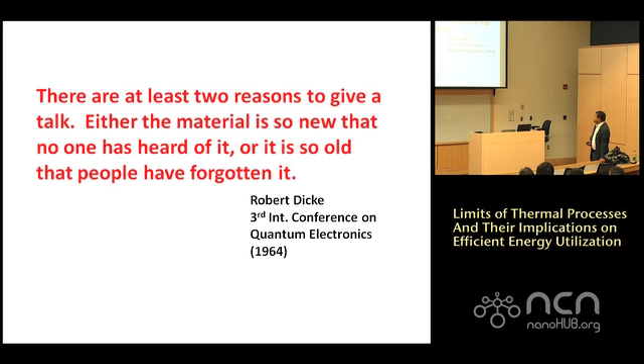This is a famous quote: there are at least two reasons to give a talk. Either the material is so new that no one has heard of it, or it's so old that people have forgotten it. I'll try the risky option of doing both.

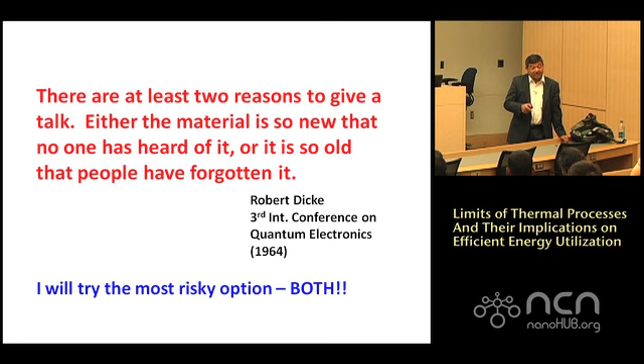I think it's important to look at old problems with new tools, because old problems generally don't go away. I'll briefly touch upon that, then go into a topic we're trying to penetrate, which turned out to be a science problem but really came from the engineering side. If you can change the science, you can go back to engineering.

Heating is about 40 to 50% of buildings' energy use. It's generally a very large fraction of industrial energy, because that's mostly petrochemicals. Cement, steel, paper, glass, these are all heat-based. And of course transportation today is mostly engine-based, and that's not going to change. We hope it will shift to electrified methods, but not anytime in the next decade at least. Engines and combustion will be around for a while, at least this century.

So given that about 90% of the energy landscape is heat, one should, at least in an academic environment, ask the question: what are the limits? There are many limits—limits of phase change, limits of radiation, limits of conduction, convection, etc. I'm going to talk about just a few of them.

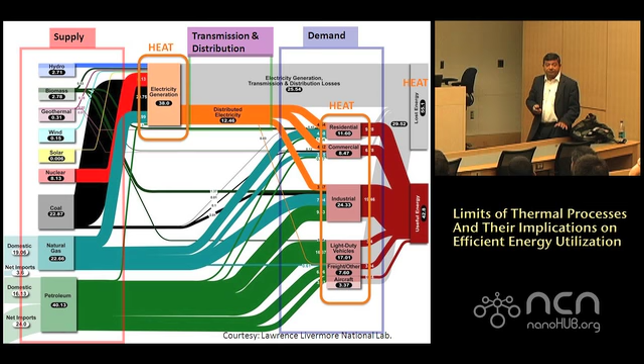And the critical heat flux is a big deal, and many people here at Purdue have looked at this very closely. For water, it's about 100 watts per centimeter squared, and that has remained - you can increase it to about 200 or so, but that's hard - it has remained a practical limit.

But it is not a physical limit. So you ask, what is the physical limit? The physical limit is when you have liquid and vapor coming out, and the vapor moves at the speed of sound. You can't move things faster unless you have compressible flows and shock waves and all that.

For most practical purposes, you've got enough of a phase change that the velocity of these molecules reaches speed of sound. If you do the numbers - density of the vapor, velocity of sound, HFG - you get about 10 to the 5 watts per centimeter squared. We are a factor of 1,000 away from the limit in the critical heat flux.

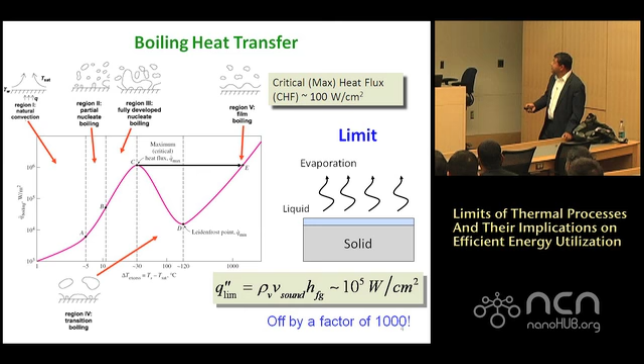This conductance is typically around 3 to 5 watts per centimeter squared per Kelvin. We're trying to push it by an order of magnitude higher and see if you can push it even higher. These are the kinds of things that are relevant not just for pool boiling, but also in heat pipes and many other engineering devices - if you could increase the limit, you can actually do a lot of interesting things.

I mentioned this very briefly yesterday - let me go over it again on air conditioning systems, which is really important for building energy consumption, etc.

There's a systems aspect to it even in a building, because most of them are centralized chillers today, and even if only 1 or 2 people are in the whole building, you've got to run the chiller. That's just inefficient. If you can do on-demand cooling as a system, you can actually do really well. The most efficient air conditioner is the one that is turned off, so how to turn things off at a system level is really important.

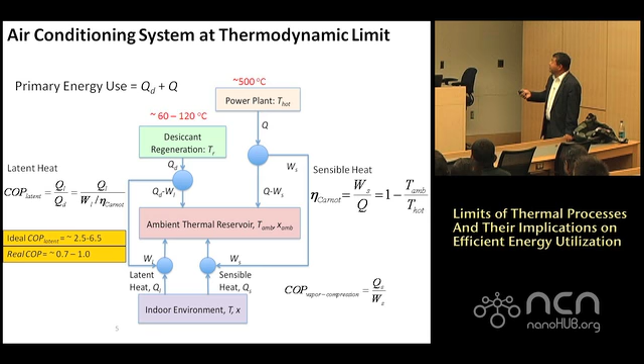And for the sensible heat, you need some refrigeration, and if these are reversible engines again, that is the minimum work that you need. You can then go through this and ask, what is the primary energy use? Not the secondary energy, but the primary energy use, which really is the carbon emissions or whatever you may think of. What is the limit, and how far are we from the limits? We think that we are about a factor of 10 away from theoretical limits.

At the theoretical limit, you don't get any work, or the rate of cooling is zero, because it's almost quasi-equilibrium. So there is an optimal somewhere in terms of cost and performance, but we thought this is a target one could go after and still reduce the cost somehow.

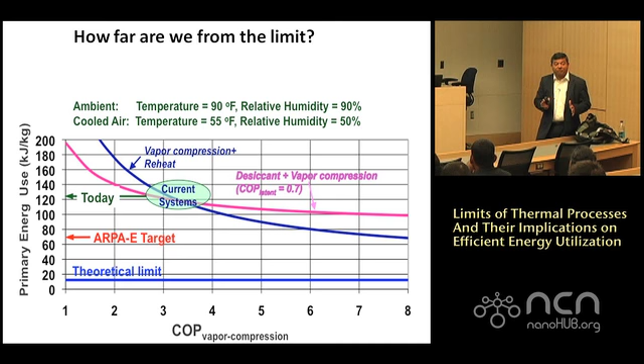This is a limit that exists, and I think there are many other limits, both system level and device level, that can be developed. It's really important to go through the exercise of system level limits and scientific limits, to find out how far we are from these limits, so we can come up with a direction for R&D.

This has nothing to do with limits, but has to do with the impact of the hydrofluorocarbons we use in air conditioning systems. Most of the growth of these air conditioning or refrigeration systems will be in developing economies, not here in the United States. If that growth continues, and there is leakage in all these air conditioners, the impact of these HFCs on the greenhouse effect is predicted to be about 25% that of CO2, because their global warming potential is about 3,000 times that of CO2. So this is a big deal.

So are there other methods of doing cooling? There are many other methods. You can use CO2 as a refrigerant, and in fact we funded some projects in ARPA-E that use CO2 in a very novel way, using ionic liquids as the working fluid. There's also magnetocaloric cooling, which is an interplay between entropy and enthalpy. Magnetocaloric involves magnetic dipoles that can be aligned with a magnetic field, using entropy to grab energy and become disordered. There's also thermoacoustic, thermoelectric, and many others.

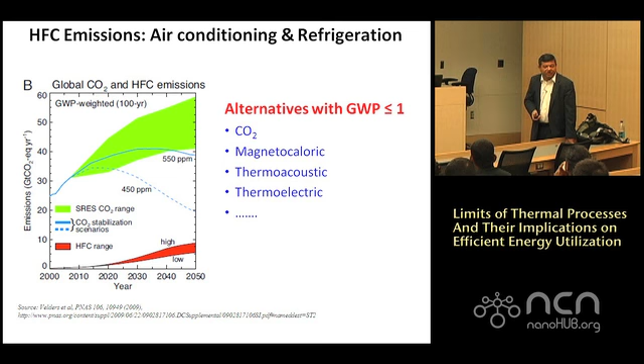So what is this? It's a heat engine. It could be used as an engine or a refrigerator. You get semiconductors and p-n junctions, and you can use that as a refrigerator or an engine. The key parameter here is the Seebeck coefficient, or the voltage you get from a temperature difference across a material. But the performance depends on a parameter called ZT, which is S squared sigma T over K. Sigma is electrical conductivity, T is temperature, and K is thermal conductivity in the denominator.

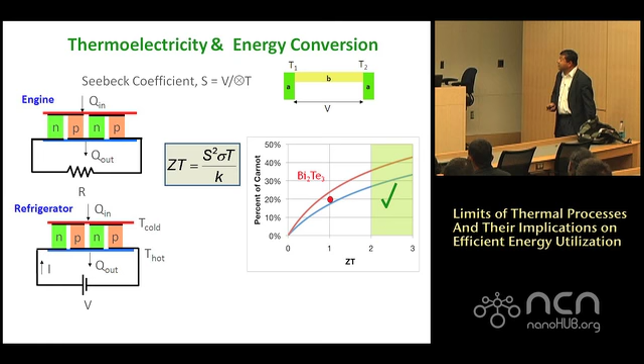We want this parameter to be high, because the percent of Carnot efficiency you can get is a monotonic function of ZT. Today's bismuth telluride is the exotic semiconductor used, and that's at ZT of 1, giving about 20% of Carnot, roughly. What you really want is a system ZT higher than 2, and a material ZT preferably higher than 3. One would think it's easy to do, because each of these parameters can be manipulated by orders of magnitude, but put them together and it's really, really hard.

Here's why. If you look at the carrier concentration in a semiconductor or metal, as you increase the carrier concentration, your thermopower goes down, and I'll get into why. Electrical conductivity goes up, and there's a peak, with the maximum at about a degenerate semiconductor, in S squared sigma. The question is, how high can this go, or is there a physical limit? I don't think anyone has proven there is a physical limit for this yet.

In thermal conductivity, there's an electronic contribution and a lattice contribution. In the degenerate semiconductor, it's somewhere out here: the electronic contribution is a little bit there, but mostly lattice contribution. You really want to reduce the lattice contribution so that this denominator in ZT goes down, and I'll come to how one would do that. But this interplay between sigma and K — they're not totally independent. I call this the Bermuda Triangle of thermoelectrics. A lot of people have gotten into it and haven't gotten out, including me and a few of my colleagues.

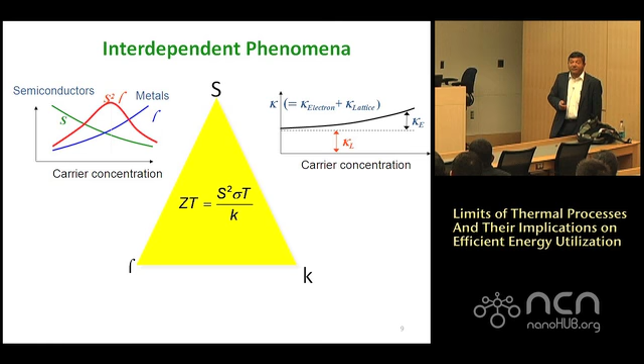It is a very intriguing problem, one of the hardest problems in materials design and materials science and engineering. We're hoping for a miracle or some discoveries, but it hasn't happened yet. For the last 50 years, people have been trying this. So let me give you a little bit of the history.

Here's why those interdependencies come in. You ask the question, where does entropy come into play out here? What is entropy out here? Well, entropy is the thermopower. Because when you go from a metal to a semiconductor, you expand your k-space for the electrons, and it is that degeneracy in the k-space that gives you the entropy. It's like evaporation - you increase the k-space of the molecules from being bound to free. The same thing happens when you go over a barrier and you essentially evaporate the hot electrons.

So the question is, can we manipulate k-space for the electrons? And here is why there's an interdependency problem out here. Let's say you have a metal and a semiconductor. With a degenerate semiconductor, your Fermi level, your chemical potential, is out here. For a metal, it's deep down there.

And you ask the question, what contributes to electrical conductivity and thermopower? The electrical conductivity for a semiconductor is low because you don't have enough carriers - this is the density of states out here, you don't have enough electrons. So electrical conductivity is low. For a metal, electrical conductivity is high. But the slope of the density, which tells you if you heat up something, is there enough k-space to accommodate - you have much more of this slope, so the thermopower is much higher out here than out there.

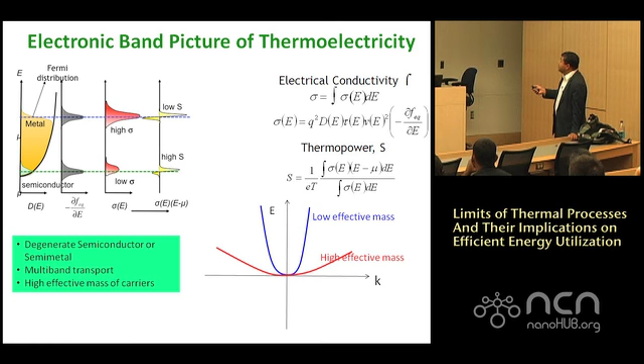So that's one - you want a degenerate semiconductor because you want enough electrons, enough carriers. But if you can get multi-band transport in these semiconductors - because one band, if you can get degeneracy, like in silicon's conduction band, you have 6 valleys - that's great, because you get more electrons. But if you can get these bands to be a little bit offset in energy, which in some semiconductors like bismuth telluride happens, you get interband scattering, and suddenly your thermopower goes up immensely. So that's the kind of band engineering that needs to be done in semiconductors, which is where the direction ought to be, and it's sort of going there.

So how does one increase the power factor, S squared sigma? Well, this was a proposal by Mildred Dresselhaus and her team, to go to quantum structures, because you can then manipulate this density of states. And it is very attractive to do that. But it turns out that if you go into 0-dimensional, 1-dimensional, or 2-dimensional structures, and you can manipulate this slope, the S, you actually go down in carriers.

So you don't actually win in many of the cases, but it's worth pursuing nanostructured electronics.

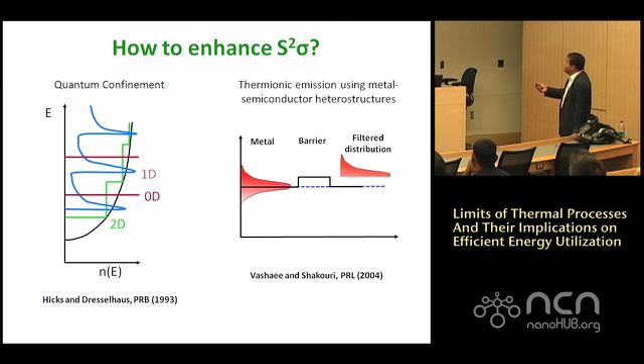The other one was Ali Shakouri's idea: if you have a metal and put a little bit of a barrier out here, you can create a symmetric distribution of electrons into an asymmetric one artificially. Thereby you can essentially get the hot electrons to evaporate—like evaporation of a liquid to a vapor—and get high values of S. If you manipulate this barrier height, you can still retain the number of electrons, and thereby get high S squared sigma. This has actually worked, and I'll show you an example of that.

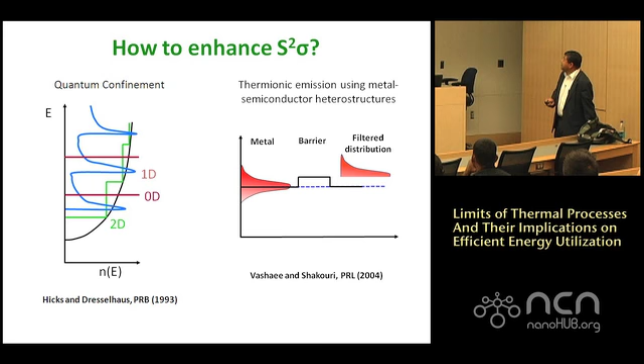So this is the history of ZT at room temperature as a function of year. Bismuth telluride was discovered in 1955, a lot of excitement. Then it went from about 0.6 to about 0.8, and a lot of people got excited. Then for about 50 years, nothing really happened, and people were trying. A lot of people—this was a Bermuda Triangle, not just for us, for a lot of other people—got out of it, got into other fields because they just couldn't change this ballgame. And Millie Dresselhaus's work showed that maybe nanostructures has a way.

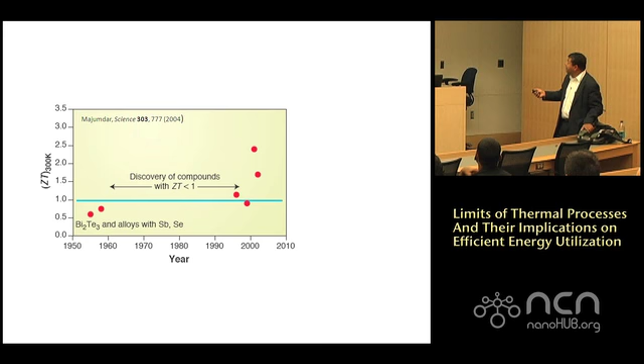What they did was say that the S squared sigma, the power factor, the numerator of ZT, could be improved, and thereby you get in. And people started making nanostructures. Yes, these were the nanostructures that were made—this is Rama Venkatasubramanian's group, Ted Harman's group. This turned out to be actually not correct later on, but nevertheless, they showed that you can get to higher ZTs.

This is Kanatzidis's group at that time, Michigan State. They showed you can actually beat this value of one. There's no physical reason why it has to be one. There is no physical limit for this—it could be infinite, in which case you'd get Carnot. Unlikely, but it could. There's no physical limit for this.

So they saw this and said, okay, nanostructures does increase ZT, just like Dresselhaus predicted. But what they found was, instead of increasing the S squared sigma—which was the prediction, the electronic side—it increased ZT because of a reduction of thermal conductivity. In all these cases, except for one, the thermal conductivity went down. It had nothing to do with the electronics. In fact, in some cases the power factor went down, but the thermal conductivity went down even further. So it turned out to be a heat conduction problem. Eventually, that was the outcome of this.

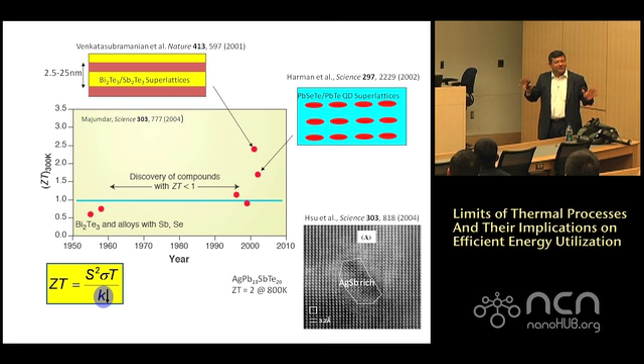So then he said, okay, why does heat conduction go down without affecting the power factor? And that was sort of the puzzle. So we said, okay, if we can get to a ZT of 3, this is a big engineering application. Let's get into it and see if you can understand this.

So let me go down to heat conduction. Many of you know this—Fourier's law of heat conduction is taught at the undergraduate level. This heat conduction K comes from Brownian motion, essentially of energy carriers, and this motion is what we call diffusion. It has a characteristic length scale, a mean free path, which is the average distance a carrier goes before it scatters. It has a speed of propagation, and these carriers have a capacity to grab thermal energy. So if you put that all together, this becomes 1/3 CVL—C is heat capacity, V is the group velocity, and L is the mean free path. This is the first level of peeling the onion from Fourier's law.

If you peel it even further, you get to the Boltzmann transport equation. This CVL can be broken up as a function of energy carriers, because many of these energy carriers are not at the same energy level—they're at different energy levels. So this is simplistic; you can go down even further. People have known for a while you can derive Fourier's law and everything from the Boltzmann transport equation. But at the fundamental level, what is often lost in that analysis is that these are wave propagation problems—this is a wave mechanics problem. So how is heat conducted on the lattice side?

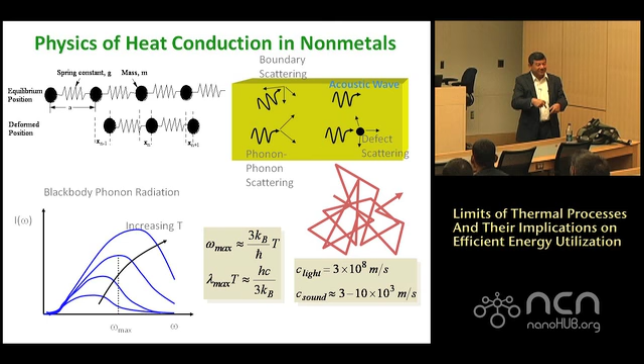So if you want to manipulate heat conduction, if you want to manipulate it spectrally, you've got to go down to the nanometer range. That's really where it comes up.

So what are the lower limits of thermal conductivity? How do you reduce K sub L? Well, you could reduce the group velocity, which is given as the square root of the spring constant divided by mass—this is just a classical mechanics problem. And so you can increase the mass by going to heavy elements, lower down in the periodic table.

So silicon is presumably not the best semiconductor for this. And you can go to weaker bonds—make softer material, van der Waals bonds or something like that, which will reduce your speed of propagation and thereby reduce the thermal conductivity. It so happens that as you go down the periodic table, in the semiconductor range at least, you get weaker bonds also, so it works both ways. And thereby your group velocities reduce, or you reduce the mean free path.

So this is what people have used in the past: you just take heavy metal semiconductors, and then you're okay because your lattice conductivity goes down, or you reduce the mean free path. The question is, how far can you reduce that? Can you do both? Or is this the best option that we have?

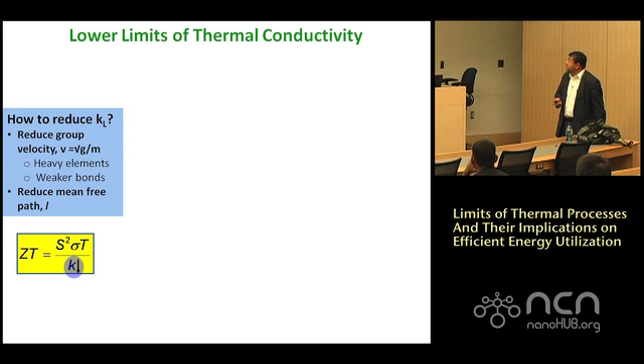So we started questioning this, and not just us—many people in the scientific community started questioning all this. How can you reduce mean free path? Well, since the 50s, at least in the thermoelectric field, people said, let's just put defects in there. You anyway need to dope these semiconductors—why don't we make them alloys? Because if you put alloys, they start scattering the phonons, just like any defect would scatter phonons, or particles would scatter photons.

And you get somewhere on the order of about 10 watts per meter Kelvin at room temperature by alloying a semiconductor. And as I said, if you want to control the band gap and the band structure, you need to alloy it anyway for the electronic side.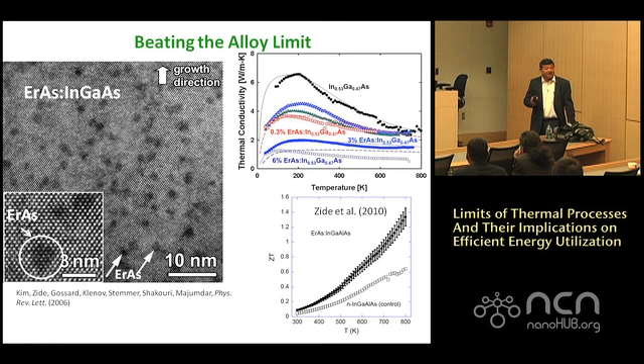Here is ZT of this material going up as a function of temperature. This is indium gallium arsenide itself, and you can cross 1, you can get 1.4 or so. But this was a model system that worked because we could control the material, and it happens to be a pretty good semiconductor as well. There's some bandgap engineering that was developed for this, but this is not a magic thing where you can suddenly get ZT greater than 1 - you actually design the material for it.

So we started looking at that, and Gang Chen and Millie Dresselhaus also looked at that in the last couple of years. They said, instead of making this high MBE thing, why don't we just make nano stuff by ball milling, put them together, sinter it, and see what happens. They found reduction of thermal conductivity without affecting the numerator, the power, the electronic side. They did it for bismuth telluride and silicon germanium, and showed that you can increase ZT greater than 1, about 1.4 or so, just like we did for indium gallium arsenide.

This is silicon germanium, that is bismuth telluride, etc. So again, it was all phonon engineering.

The question was, okay, we can get to about 1.5. Getting to 2 is difficult. Rama Venkatasubramanian showed 2.4, but that's really, really hard. Is there a fundamental jump we can make, something we can do much more, that we can leapfrog over these incremental changes? These have become incremental right now - last decade it was not incremental, now it is. The question is, can we jump even further?

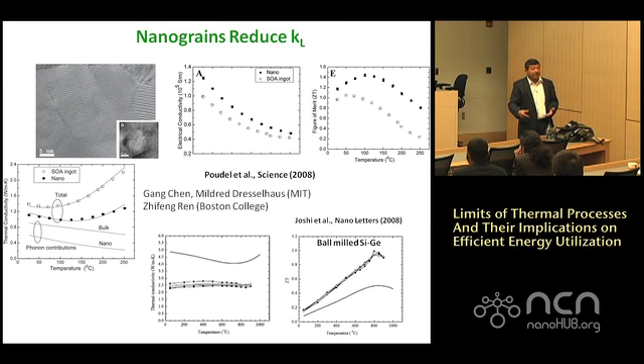Which means you've got to find new ways of reducing thermal conductivity that haven't been tried before, okay, or changing the power factor that hasn't been tried before. This got us intrigued, and we took a very different approach, which is almost blasphemous - and that is using silicon.

Silicon, as I said, is a light semiconductor. The thermal conductivity is very high. The people in the semiconductor industry like that because they can dissipate heat. I'll show you the numbers. It doesn't make sense at all, except for a few other things - the physics can be controlled in very interesting ways. Let me explain.

In silicon, or in semiconductors where the electronic mean free path is a few nanometers - and in doped silicon it is - the phonon mean free path is several hundred nanometers, so there is a length scale gap. This means if you make your semiconductor this size, you will not change your electronic properties, but you will reduce your thermal conductivity by an order of magnitude. That's the idea. So this is silicon.

The mean free path is anywhere from, depending on the wavelength of the phonons, 100 to 1,000 nanometers. Bismuth telluride is 1 nanometer or so. The thermal conductivity as a result is 2 orders of magnitude higher because the mean free path is 2 orders of magnitude higher. On the power factor side, the electronic side, silicon is actually a little bit better than bismuth telluride, but it's about the same number. So this ZT is about 0.8, and this is 2 orders of magnitude lower, primarily because of thermal conductivity.

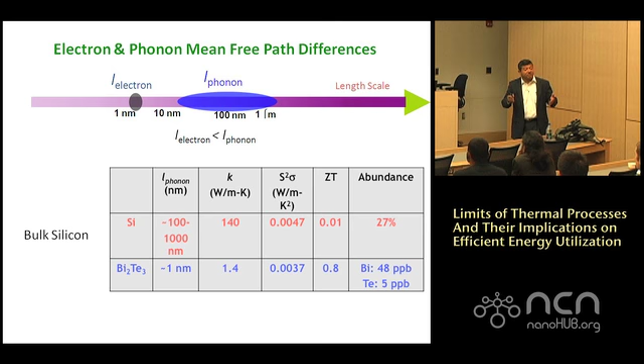Abundance: silicon is 27% of the Earth, bismuth is 48 parts per billion, tellurium is 5 parts per billion. So he said, okay, the thing is thermal conductivity here, and if we are thermal conductivity jocks about this, let's go after it and see if there's any chance of doing anything interesting to reduce the size and reduce the thermal conductivity by 2 orders of magnitude. We don't understand all the principles, I can say that up front, but we are trying to see whether we can get down there.

So the idea was to make nanowires, okay, and to reduce the size. We developed this technique - most of you probably know this, if not I'll go quickly - of measuring the thermal conductivity of single individual nanowires. These are 2 suspended heaters, this is a classic heat conduction experiment: 2 heaters, 2 temperature reservoirs, one higher temperature, one lower temperature. You pass current through this, electrically heat it, and get I-squared behavior for current and temperature. There's a 4-point probe, so you can use it as both a heater and a temperature sensor.

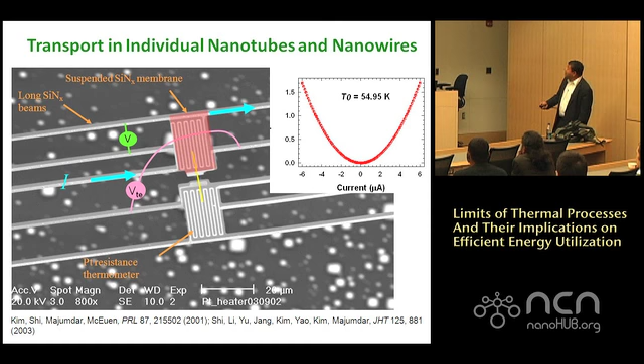You heat this, and the heat flows through this nanowire to the other side, raising its temperature. You pass a small AC current to measure the temperature, and from this temperature difference, and by characterizing these legs, you can find the conductance of these legs. You can get the total heat flow through this, the temperature difference, and the conductance. From the geometry and the conductance, you can get the thermal conductivity, you can do everything you want.

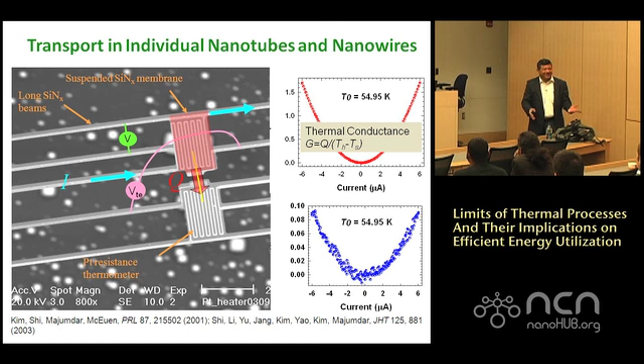And we have used this for carbon nanotubes. Whatever one-dimensional nanostructure we can find, we can put it on this device and see what the thermal conductivity is.

So we looked at some early experiments of a new way, actually not so new - there were some experiments in the 70s - but nevertheless a very interesting way of making single crystal silicon nanowires. This is done by putting a catalyst of gold on a surface and then exposing it to silicon. It forms a silicon-gold alloy, and beyond a certain point, silicon is precipitated out, which forms a nanowire of the size of this particle.

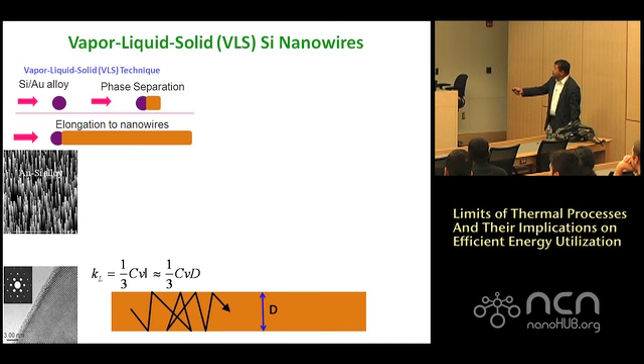The question is, can we break off some of these nanowires, put them on our device, and measure? The idea is that we can control the diameter by controlling the particle size. If this diameter is smaller than the mean free path, the phonons would bounce off the boundaries, and instead of the mean free path being controlled by phonon-phonon scattering, the diameter would control the mean free path, giving you 1/3 CVD. So as your diameter D goes down, your thermal conductivity goes down. This is a fairly well-known approach.

The question is, does it work? It certainly does work. This is thermal conductivity as a function of temperature for different sizes: 115 nanometers, 56, 37, 22. Even at 115, this is on the order of 50, whereas bulk semiconductor silicon is 140. So you can say right away that the mean free path in the bulk is certainly larger than 115 nanometers - in fact, on the order of 300, 400 nanometers, some of them about a micron.

As you get down to 22 nanometers, the theory - this is Boltzmann transport - does not match up. Some very interesting physics comes out of that itself. Nevertheless, you can control it. But even in this case, at room temperature, which is our interest, you're at about 5 watts per meter Kelvin. That's just not good enough.

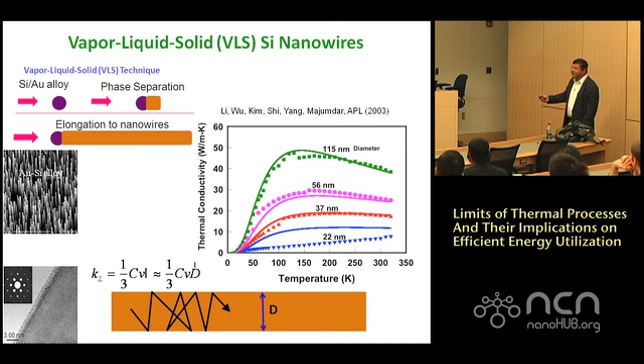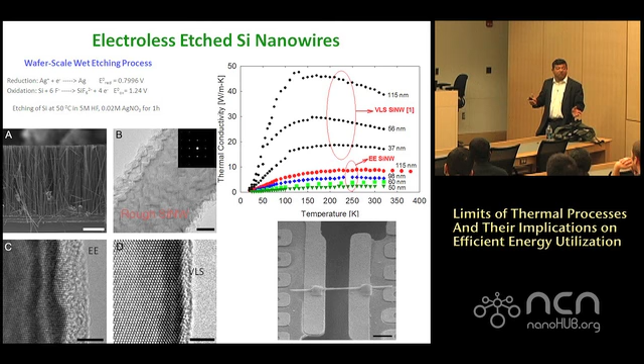And we thought, can this be true? So we repeated the experiments, reduced the contact resistance in various different ways, and we found similar results, but uncontrolled - we could not control the thermal conductivity, but it was low.

So what we also found in some of the wires - this is thermal conductivity as a function of temperature - depending on the doping level and the roughness, it approached the amorphous limit in a crystalline wire, which was totally mind-boggling for us because we never expected that, and one would not expect that. As a result, the ZT shot up to about 0.6 or so, and that turned out to be quite interesting because now we're within range of hitting the target of 1 and beyond.

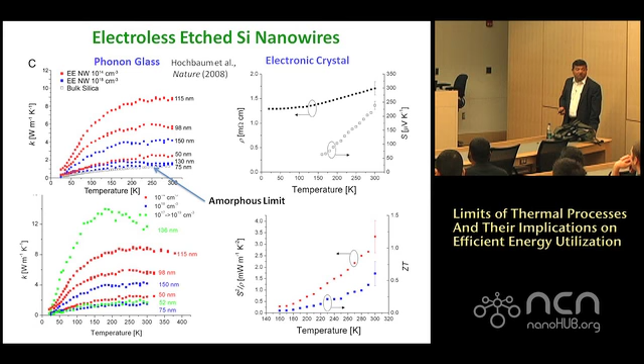The question is, why does the thermal conductivity go down, and is this really true? Does the roughness really control the thermal conductivity? We did many other experiments. So the questions are: why does surface roughness decrease K? Why does K approach the amorphous limit in crystalline material? Simple Boltzmann theory does not explain the results here. This is thermal conductivity as a function of etching time, which controls roughness.

So these are the TEM pictures. This is smooth, slightly rough. So we went from the VLS wire, which was really smooth, and started etching those instead of making just etched wires. And as you increase the roughness, yes, the thermal conductivity goes down.

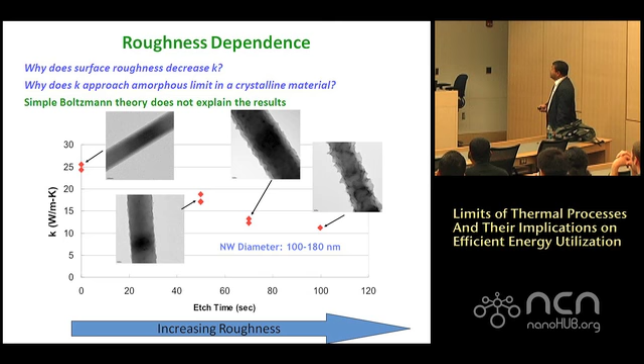And that's, again, something Boltzmann transport doesn't quite explain. Question is why? And I would say we still don't understand completely. But one of the things we're looking at, going back to the spectral side, is something we're trying to prove. We don't know whether it's true or not, but it's a hunch. And the hunch is maybe there's some correlated effect of multiple scattering events happening.

These are elastic scattering events. And the idea is that if you bring disorder into a system, these waves will interfere in ways that have been looked at for electronic systems and photons. There's a famous paper by Phil Anderson in 1958 called Anderson Localization.

Anderson Localization says that if you get a metal, for example, and the metal is conducting, if you increase the degree of disorder in the metal, the electronic wave function will scatter, but they will scatter in such a way that locally they interfere destructively. Essentially the wave packet will not propagate. You will localize it, and you'll get evanescent waves later on. Thereby you can make the metal into an insulator.

So this transition—and of course there are other theories, Mott insulators, etc., that came around. It's very famous; not all localization has been explained in different dimensions, but this is very well known in the electronic field. And there's no reason—people have shown it for electrons.

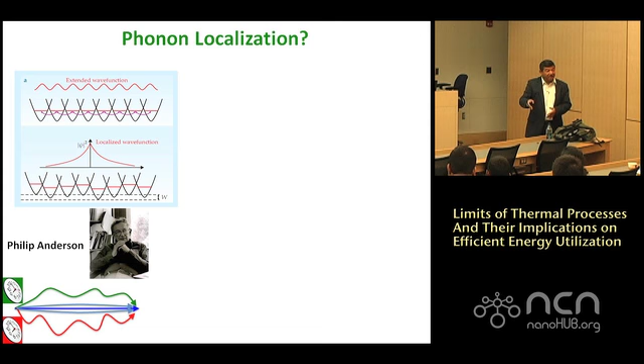So we did some theory with my colleague in the physics department at Berkeley, Joel Moore, and his student Patrick Murphy. They said, okay, what is the length scale involved? What are the different length scales involved in this? One is the dephasing length.

Dephasing length is the following: if you have phonon-phonon scattering, you lose all memory of the phase. And if you lose memory of phase, these correlated scattering events are gone—there will be no correlated scattering. So the length scale of the object you're looking at has to be lower than the dephasing length. That's one length scale, the length of the nanowire.

The other is the localization length. That means it needs time for it to interfere, to localize, and there's a length scale associated with that. The size of the object better be larger than the localization length, otherwise the evanescent waves will grab the energy and just move along. So that's the length scale.

So we said let's at least figure out, as a function of the roughness of these wires, the size, and in this case the autocorrelation length, what is the dephasing length and what is the localization length. It turns out—we were hoping it would go to room temperature—but right now the theory predicts it's most likely going to happen at lower temperature. And no one yet, to my knowledge, or to the knowledge of physicists who have worked on this in the 60s and 70s, has ever shown localization phenomena, Anderson localization, for phonons.

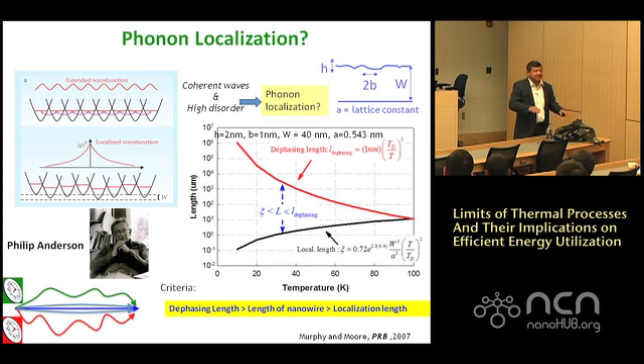If you could localize, then you could really reduce the phonon conductance by interference effects, which is totally wave spectral, which can reduce the thermal conductivity even below the amorphous limit. And that's what we're going after.

So what are the signatures of localization? Well, if you plot the thermal conductivity, or conductance times length, which is really the thermal conductivity, if it's purely diffusion, it would have no length dependence.

If it is ballistic transport, the thermal conductivity increases as a function of length because conductance is constant. But if it is localization, the thermal conductivity will decrease with length. If you find a sample, or a collection of samples, where thermal conductivity decreases with increasing length, I don't know of any other reason but localization. But no one has ever observed this.

The other effect is the temperature dependence. This is conductance versus temperature. If it's purely classical heat conduction, in the sense you have T-cubed behavior for the heat capacity and propagation of all the modes, you will see something like this. You'll see a little bit of linear behavior, and then increasing as more and more modes get excited, you get this increasing trend.

If you have localization, you will see a region which is flat, where you can excite the modes, but they won't propagate, and this essentially flattens out. My theoretical colleagues predict it's going to be lower than the quantum of thermal conductance. Just like you have a quantum of electrical conductance, the quantum here is pi squared kb squared over 3h, multiplied by T. It's linear with T.

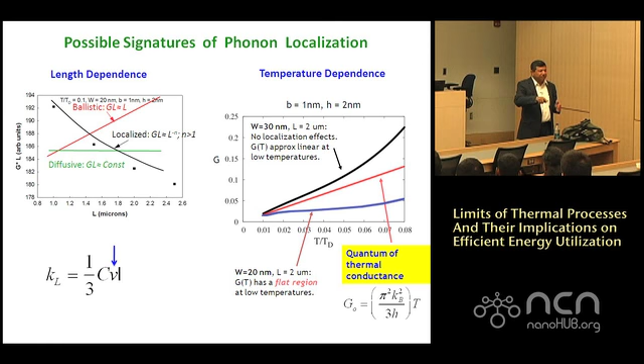So instead of making these nanowires separately, we realized this issue about contact resistance is a big deal. We need to control the size, dimension, and everything, and putting wires on a device is not the way to go. So we changed our whole experimental system, and we are now making electron beam lithography wires integrated in the silicon. The nanowires are integrated together, made of the same material as the heater.

So this is using silicon-on-insulator device wafers, making the pattern. Everything is integrated, and when you do e-beam lithography and photolithography, you can control the length, you can control the dimension, you control everything. And since it is monolithic, there is no contact resistance. So that's the way to go if you really want to get into the science and understand this the right way.

So these are now devices, 60 nanometers by 40 nanometers. You don't see them very well out here. You can make ribbons, of course. You can make 100 nanometers, 40 nanometers, but long - you can control the length because everything is lithography now. There is no nanowire being put in; these are the devices that we are now trying.

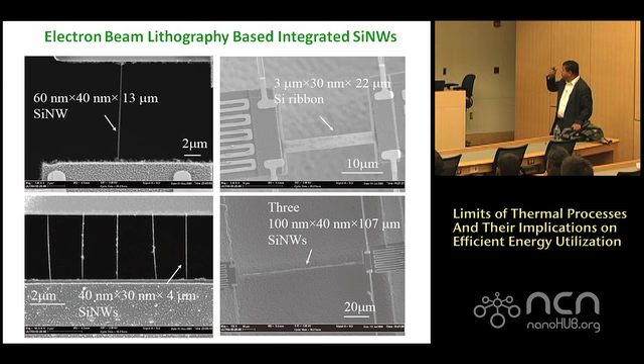This fabrication turned out to be really hard for a variety of reasons. We are now getting the devices and trying them out. These are single crystal, these are roughened. Also, the roughness is not controlled, but nevertheless there's roughness, and we have measured the thermal resistance as a function of length.

The good news is that as you reduce the length, the resistance goes to zero, which means there is no contact resistance, which is a good thing. Because people have been asking us questions about our previous data, saying, well, there might be contact resistance out here. This is data showing that there isn't.

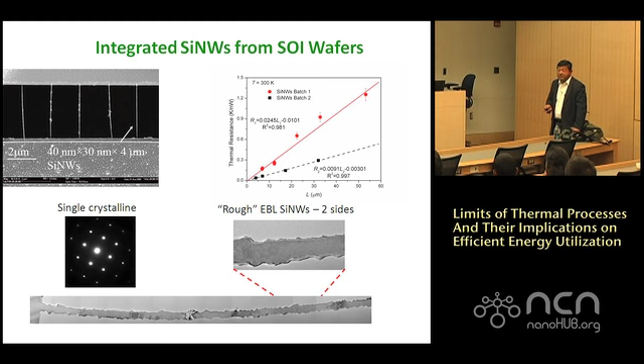And we have now measured the first few measurements of thermal conductivity as a function of temperature of these VLS wires that I showed you. This is the electron beam lithography, slightly roughened, and these are the really roughened wires of EE. We're seeing results at least in the order of magnitude.

Have we seen localization yet? Not yet, but stay tuned. This is the experiment that we're trying, and we'll see how it goes. Only the data will show us.

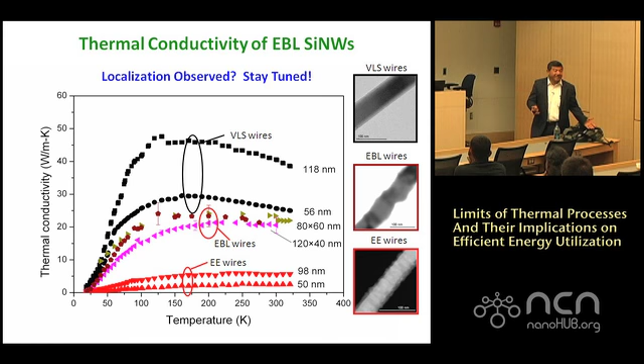So anyway, let me summarize. I very briefly talked about limits of boiling, thermodynamic limits of air conditioning, but I spent some time getting deep into one subject which we are now pursuing: beating limits of thermal conduction, beating the alloy limit, approaching the amorphous limit, and hopefully beating the amorphous limit using localization, which would be new. I don't think people have really tried that, pushed hard on that, although people were pushing that in the 70s - Venky, Horst Stormer, and others were trying to do that.

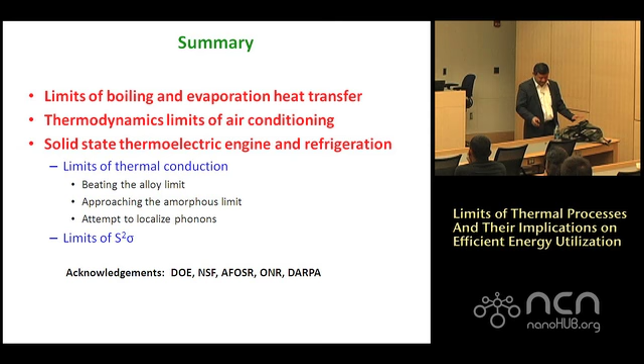I have a question about phonon localization. I think phonon localization has to do with some kind of geometry parameters, like the roughness scale, the length scale, something like that. But the phonon, on the other hand, has a broad range of wavelengths.

Right, say maybe a certain length scale will localize phonons with a certain wavelength, but this is a good question, because phonons have a broad spectrum—how do you localize all of them?

If you look at the roughness and the spectrum of that in K-space, you'll find that it's a broad spectrum as well. So random is good in this.

Periodicity is bad. If you make a superlattice structure with the same period, you get one length scale in, but the other phonons go through. So some phonons are localized—that's the famous experiment with Venky, Horst Stormer, and Bob Dynes, making band gaps in gallium arsenide and aluminum gallium arsenide in the 70s, where they were able to localize one band.

But if you make it random, you get essentially resonant coupling between the K vector of the phonons and the K vector of the roughness, and then you can do it. So randomness over a whole range of length scales is a good thing here.

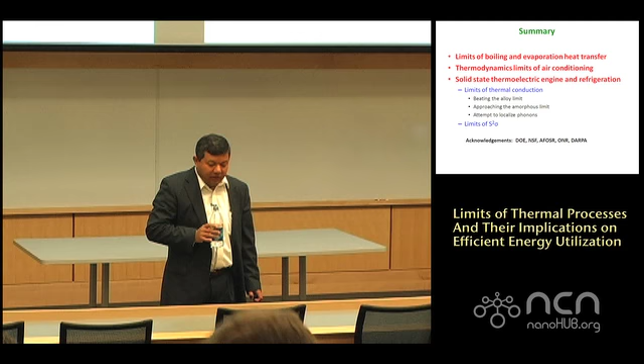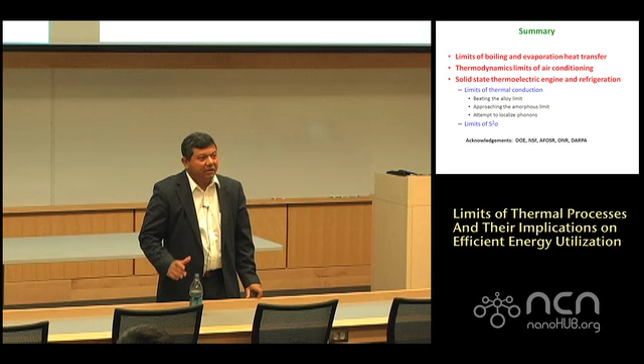Right, there's a Bethe scattering limit of size raised to the 6th power for any wave propagation through an aperture. These apertures are 40 nanometers now—it's not small enough. You have to get down to a few nanometers for those wires, which are really hard to make, so we're not at that limit yet.

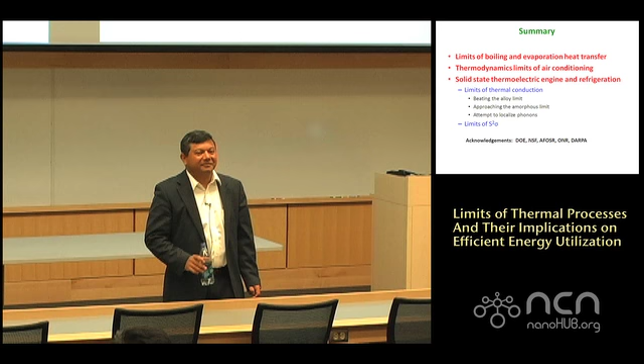I've seen some recent data on twin crystal structures where there's an edge, a disorder in the edges. Do you think that maybe that's an experiment? Have you thought about looking at those, or could that help with the question?

That could help, because there'll be an impedance there. Potentially that could help. Right now we're just trying to make our devices and get some data and see, but there are a lot of experiments I want to do.

By changing impedances on board this device, you could actually get to so-called one-dimensional structures. These are not really one-dimensional—they're, for all practical purposes, 3D. But you could get to 1D structures and look at phonon transport in 1D. There are a lot of experiments that can be done, including the twins, but we haven't had the bandwidth yet. If anyone wants to do it, I'll be happy to tell you how we do it.

When Art is growing those indium gallium aluminum arsenide alloys, are you adjusting the composition so that you get a small separation between the central valley and the satellite valley? You get a big asymmetry in your— right?

Yeah, so I didn't talk about the electronic side of it. This is where John Bowers, Ali Shakouri, and Art Gossard come in. Art Gossard grows the materials—it's actually digital alloying for indium gallium arsenide and indium gallium aluminum arsenide to control the band edge.

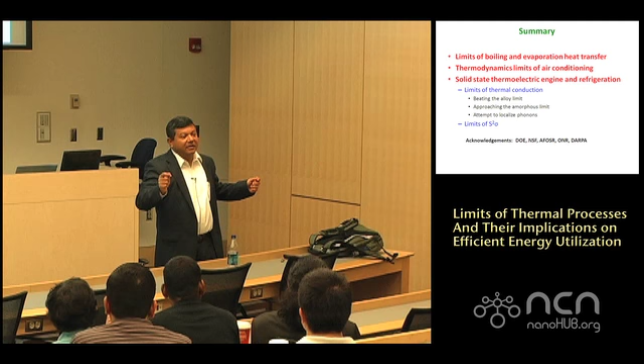1958, actually. But that's not the big question, right? It's accepted that it exists. It exists, but no one knows whether it actually happens or not. It should exist, but no one has demonstrated it, because unlike electrons and photons, phonons have this phonon-phonon scattering effect. So if you try to localize one mode, it leaks through other modes. So no one has been able to localize all the modes, as you were asking. That's what we're trying out here, because if you make random roughness, the spectrum has to be broad enough to match the spectrum of the phonons - then you get resonant coupling. That hasn't been done. I don't think anyone has actually seen it, because it's very hard to approach through molecular dynamics - I don't think you'll capture the length scales. It has to be a wave mechanics problem.

Absolutely, yeah, but you have a chance of doing it if you get away from MD.